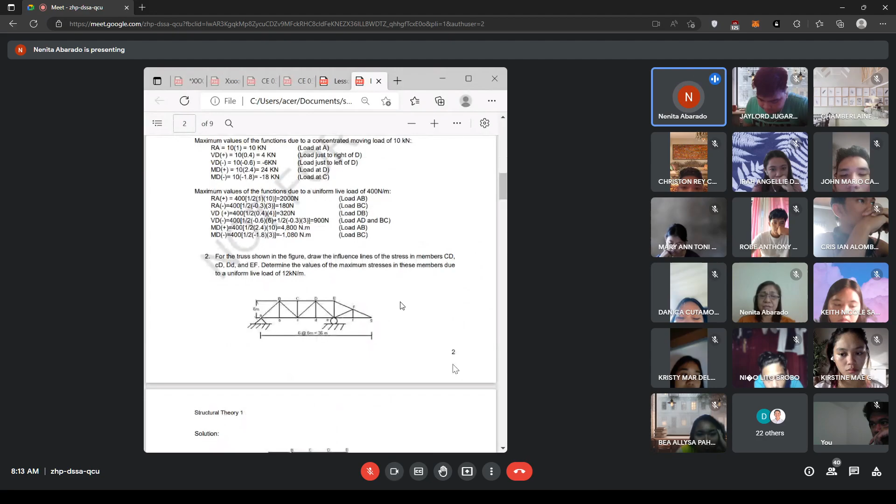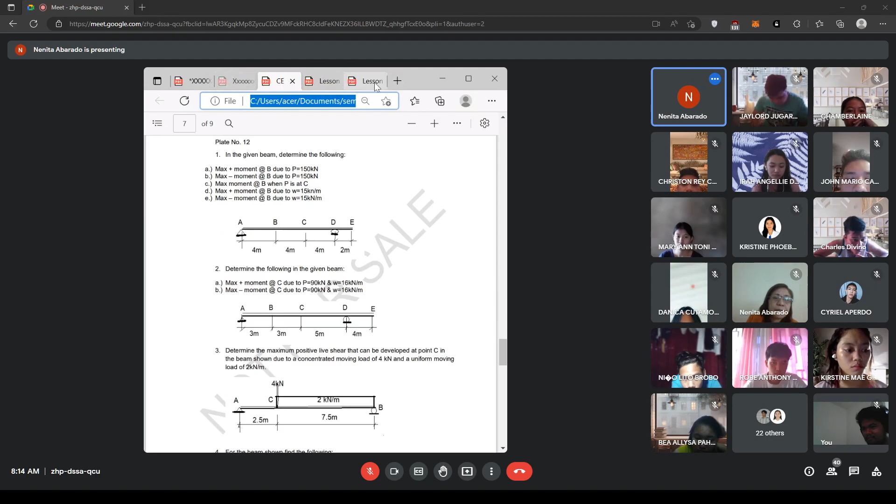So actually, class, pwede tayong mag-consider ng, let's say, 10 kilonewton concentrated load. So ang ating problem is to determine the maximum value of positive shear at point C. Or, pwede rin ang maximum value of negative shear.

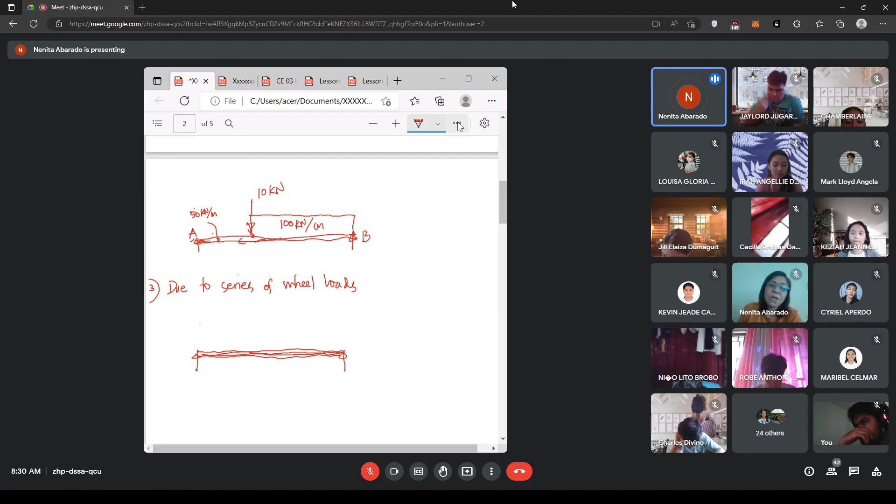Okay? Then, kung given na dead load mismo, dead load is not a moving load, kaya i-consider ninyo kung may given siya. Ang problem natin walang given, so kinonsider lang natin yung moving load. Okay, this is just a clarification. So, let me erase this. Kasi maybe, with all the references, all the learning materials that you can be exposed to, baka makakita kayo ng mga cases na may dead load si beam. That is really possible. So therefore, in analysis, i-consider ninyo si dead load, kasi may weight ang materials natin.

So, now, ang problem natin is, how about if we are all to be exposed due to wheel loads? Let's say this is a bridge deck. Ito ang beam ng bridge deck. Okay, so therefore, this will be analyzed due to wheel loads.

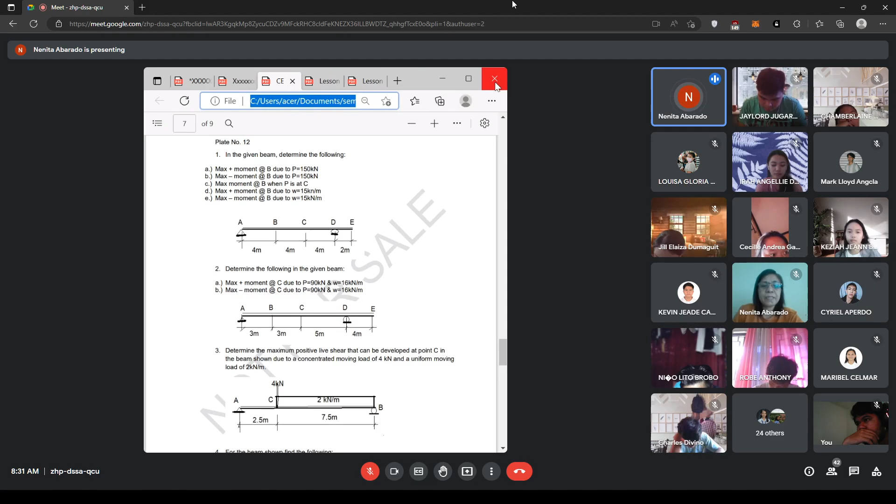Akin na lang i-off para hindi masyadong maingay.

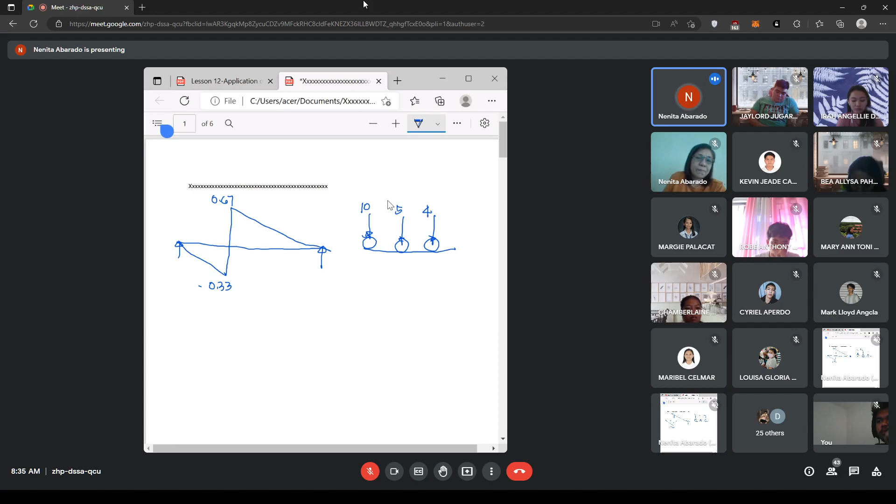Okay, class. So, this is just an example, ha? Let's say this is wheel loads. Let's say, sa car, car wheel loads. Kini ang wheel loads ng ating car. So, let's say, ang ating direction is going to the left from the right. Kini ang ating front wheel, kini ang ating last wheel. So, let's say this is 1, this is 2, and this is 3. Class, can you see it, class?

Yes, ma'am. Now, we want to determine the maximum shear at points natin. Let's say the problem is determine the maximum positive shear at point C due to these wheel loads, due to the given loads. Okay. Di ba, na-establish na first talaga, class, i-establish natin si influence line diagram. Importante ang mga ordinate natin. And then after that, ang due to concentrated load, as well as if there is also the uniformly distributed load. Now, how about if we have a series?

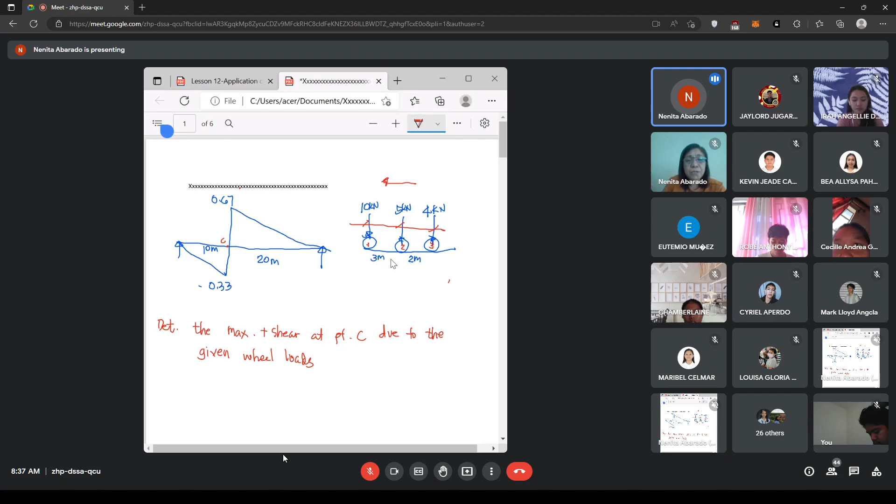Obviously, alam na natin ang distances kay wheel loadings man eh. So, if we want to get the maximum positive shear, kakaroon tayo ng trial and error, class. Let's say, trial 1. Ang trial 1 natin, let's say, 10 kilonewton at 0.67 ordinate, at point C na lang. Butang natin si 10 sa point C. Magkakaroon kayo ng tulo ka trials kay tulo ka loadings.

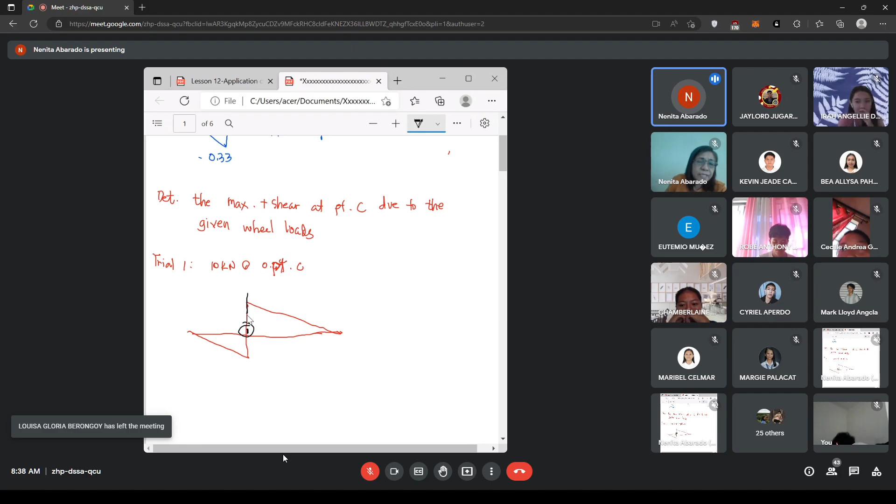Butang natin dire si load 10 kilonewton. So, load 1. Kung kini ay 10 kilonewton, mukuyog ba yan si load 2 at si load 3, class, ha? So, say magnitude, we have 5 and 4. So, 5 kilonewton at 4 kilonewton. Okay. Kuhain natin si slope. By triangle, di ba, this is 30. Ang kini ay 10 meters at kini ay 20 meters. So therefore, this becomes 1 is to 30, 1 is to 30, parehas din eh.

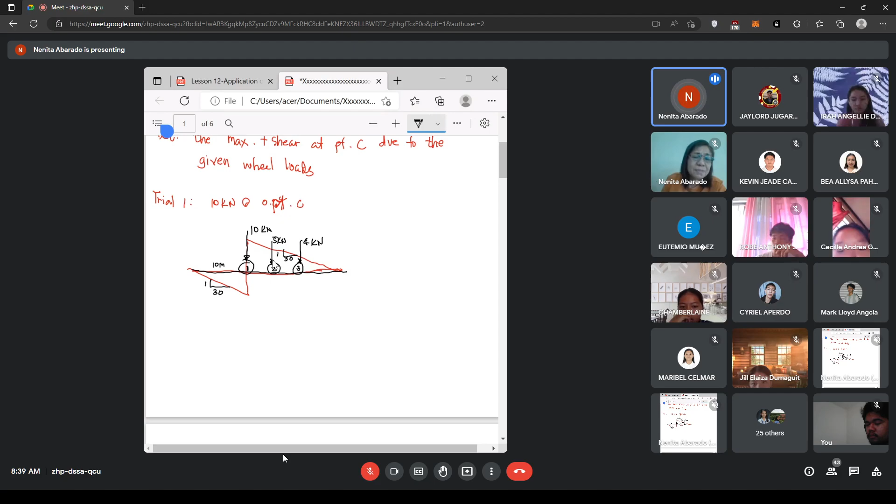Hindi ko na i-elaborate, kay third year na naman kayo. So you know already the property of the right triangle. One of the properties of the right triangle is the ratio and proportion natin. So therefore, with this ratio, yun ang gamitin natin. Kung hindi ratio ang gagamitin nyo, kukuhain nyo lang ang ordinate ng mga point, pero mas maganda ang ratio and proportion. Kung kini ay 20, ang distances is 3 and 2. Kini ay 3 meters, kini ay 2 meters. So therefore, at this point, kini ay 20 minus 3, so 17, and this is 20 minus 5, so this is 15.

So therefore, the way you're going to solve this is like this. This is A, and this is B. This is your point C. Okay. So maximum positive shear at C is equal to, butang natin si 10 times ordinate, 10 times 0.67. Or pwede nyo na rin gamitin yung slope niya, para hindi na ordinate ang gamitin natin. Kung sa slope, we have 1 over 30 times 20. What is 20 over 30? That is also 2/3, and that is 0.67. Nakuha nyo, class? 20 over 30 is 0.67. Just the same, para ka lang nag-multiply ng ordinate niya. Nakuha niyo ang point?

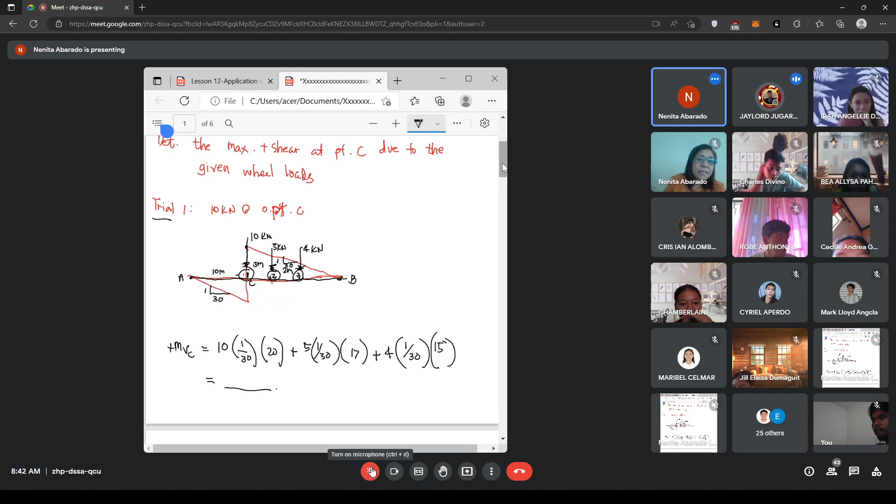Okay? Next trial, 2. Butang natin ang 4 kilonewton at 5 kilonewton, 5 kilonewton at point C. So, si 5 kilonewton, dalhin natin sa maximum ordinate. Tingnan natin makita sa inyo sa figure. So, again, nagari si 5 kilonewton.

Okay. Nagari na sila ni, kung kuni ay 5 kilonewton, kini si 4. Okay. Nasa niyo sa 10, abante na sa 10, nagari na sa 10, si 10 kilonewton. So, unsa naman ang ating distances now? 3 to, ano? So, do not forget, magkakasama yan. 3 meters, 2 meters yan. Okay. So, this is 10 meters, and this is 20 meters.

Okay, so yan ha. So, how are we going to do this? Again, the same. We have positive shear, maximum shear at C, is equal to 10, okay, 10, di ba? 10 times, di ba? This is also, para sa mga class, dapat ang kanilang slope, no? Para sa mga slope, 1 is to 30. Kasi dito, sinabayan natin yung 10 plus 20.

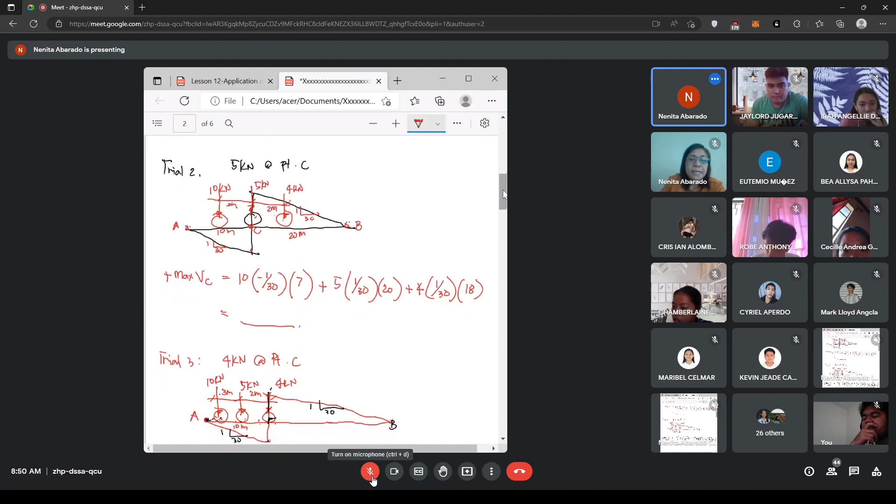So, kini class, dinhi ko kinuha din sa triangle sa positive portion. Kay positive pa man. But, definitely, kining 10 and 5, dinhi na siya ni fall sa negative portion. Kay nadiri naman sila. Okay? So, therefore, you're going to get the sum. And among these 3 values, kunin ninyo ang the greatest value. And that would be your maximum shear. Is it clear? Na mangutana ali kayo kung naa pa may question. This topic was discussed yesterday. Okay?

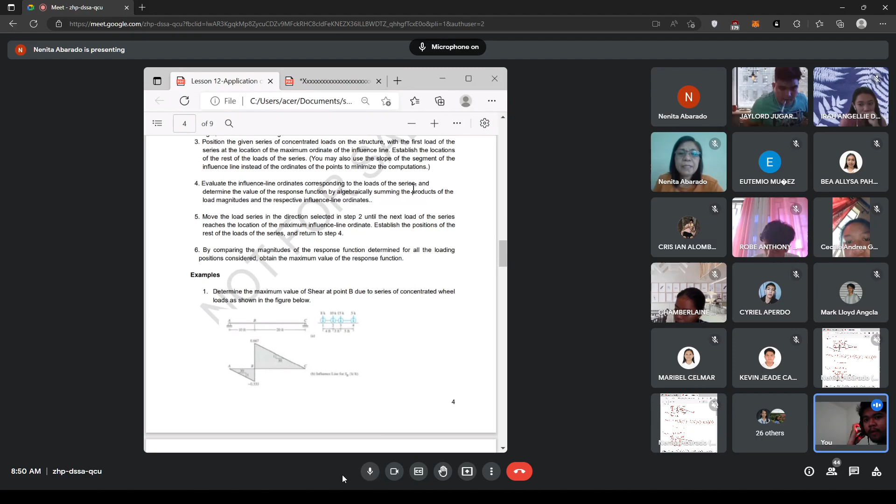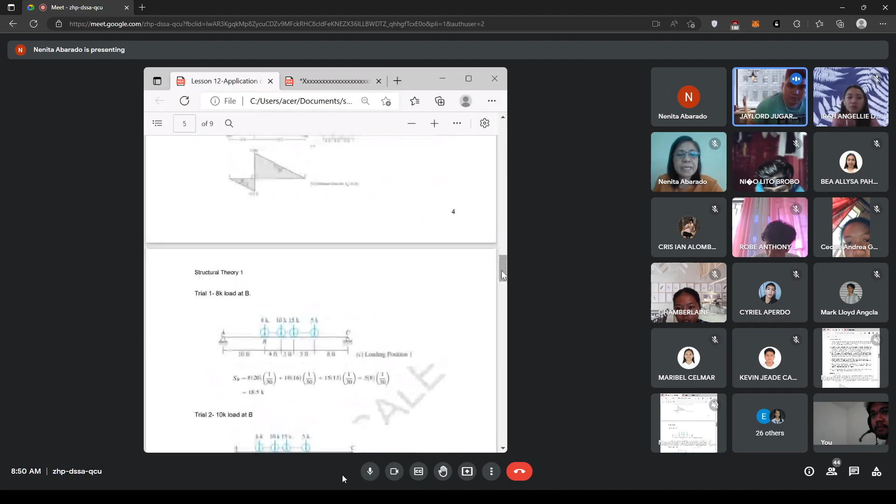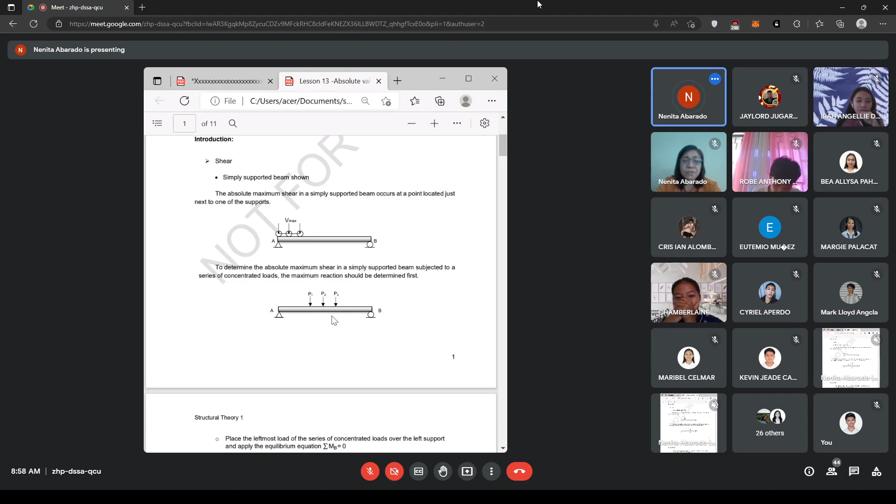And we can determine the absolute maximum shear in a simply supported beam. Again, when we say simply supported, the supports are roller and hinge, subjected to a series of concentrated loads. We are going to determine the reaction first, and not yet the absolute maximum shear. Determine the reaction first.

And then place the leftmost load of the series of concentrated loads over the left support and apply the equilibrium equations. Let's say the loading is P1, P2, P3, concentrated loads. Let's say it occurs at point A. So using the equations of equilibrium, determine the reactions, okay? And then place the rightmost load of the series of concentrated loads over the right support and apply again the equation of equilibrium.

So, ibig sabihin, butang natin din sa point B ang ating series of loads, and then getting the moment at A, get the reaction again. So, the largest value of reaction obtained will be the absolute maximum shear. So, it is just noting that we are just going to place the series of concentrated loads to one of the supports and then get the value of the reaction there.

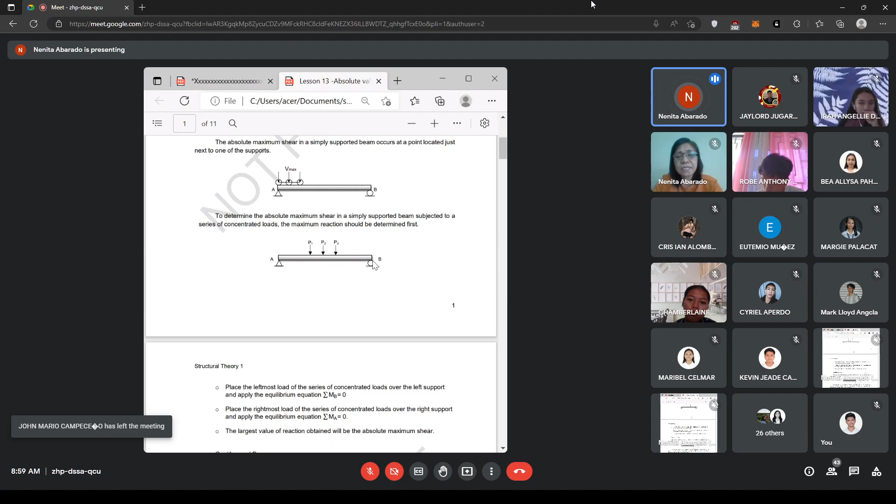Then gusto natin subukan sa ibang support, sa another support, place the loads sa support, let's say at B, and then by using the equation of equilibrium, get the reaction, and then you're going to compare alin ang bigger value, no? Nasaan ang maximum value? And that would be the absolute maximum shear. That is for shear on a simply supported beam.

For a cantilever beam, let's say cantilever ang ating beam, no? Ano ba yung cantilever? One end is fixed, other end is free, no? Free end. So take note that the absolute maximum shear in a cantilever beam will occur at a point located just next to the fixed support. That is the location where the absolute maximum shear is located.

Okay? So the absolute maximum bending moment, kung moment na siya, in a cantilever beam, of course, at the same point where the absolute maximum shear occurs. Although, in this case, the concentrated load should be positioned at the far end of the beam. Ibig sabihin ng far end, di ba? Ang isa ay fixed, other one is free, butang nyo sa free end. Then get the reaction. Kasi ang reaction nasa fixed man gud siya. Kaya nga it occurs just next to the fixed support.

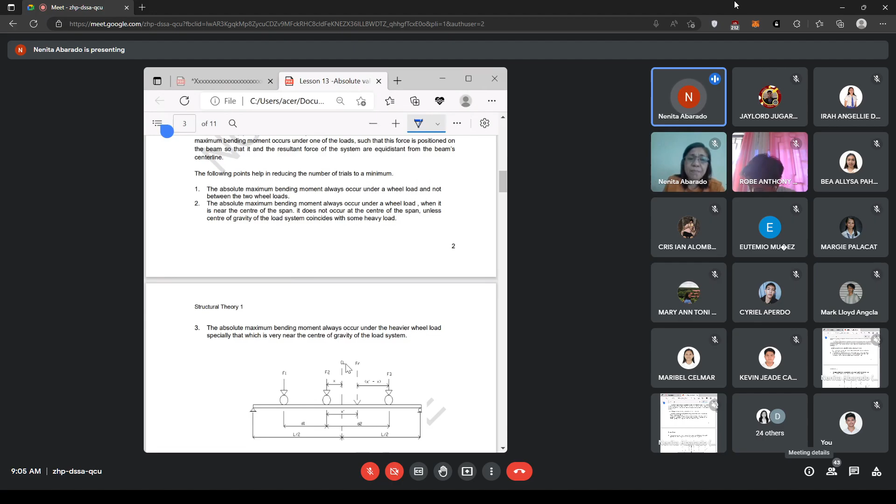Ang first step, class, is we are going to get the center span. Alin ba yung center span? Yung midpoint ng inyong beam. And then, if the absolute maximum bending moment occurs under one wheel load, when it is near the center of the span, it does not occur at the center of the span unless the center of gravity of the load coincides with some heavy loads. So let's say for example, ipoposition natin si resultant load. We are going to get the resultant of these 3 loads. Di ba? Naa tayong tulo ka loads. Kuha si resultant.

What is the resultant load? The sum of our loadings. Then, in our trial and error, we place the resultant load and one of the loads equidistant from the center line. So we need to get the center of your beam, then position your trial load and the resultant load so that they are equidistant. The distance from the center line should be equal. Then, solve for the reactions.

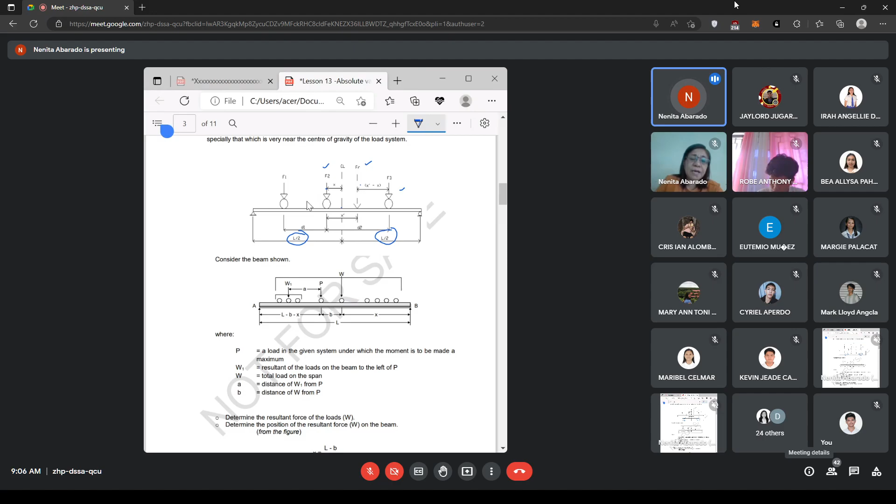Okay? Let's say, for example, let's take an example, class. Let's say a truck and trailer combination. So, meaning, there is the truck, and it also pulls a trailer. Having the axle loads shown, let's say 15, 25, and 50 kilonewton. In the figure, it rolls across a simply supported span of 12 meters. Okay, this is 12 meters.

These are our given wheel loads. Since we said wheel loads, obviously we note the distances between each load. Let's say for our trailer it is 2 meters, and then to our front wheel it is 6 meters. So, class, our beam is 12 meters, and the truck will pass through here. We are going to determine the magnitude and position of the resultant load. Let us get the resultant load. What is the resultant load?

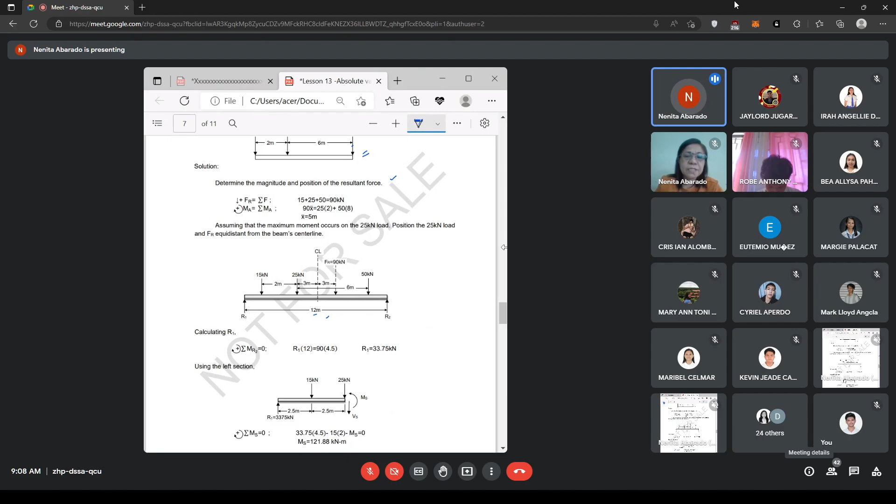Okay, class, are we still together? Can you hear me, class? Okay. So, the resultant is 15 plus 25 plus 50. Got it? Therefore, that is 90. That is the value of the resultant load. And then, we are going to determine the centroid. Find where this resultant load is located by getting the centroid of this group of loads. So how to get the centroid?

Our 90 times bar x. So this is our 90. From any of the loads, let's say, we take a reference point to locate it. Let's say our reference is the 15. From the 15, what is the distance to our resultant load? That is our center of gravity. So, class, you need to specify where you are referring from. You can choose any reference, but the result is the same.

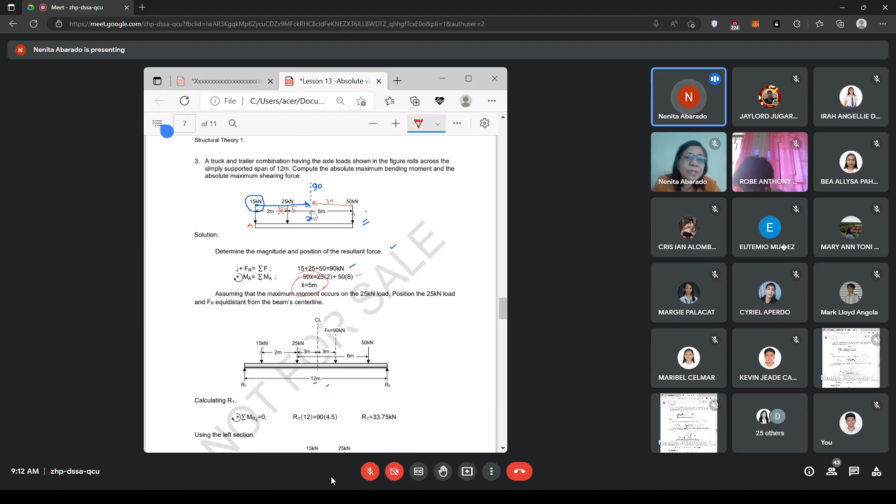After locating the centroid, from 15 to the resultant load is 5 meters. Summation of moment at A: 90 bar X, so bar X is equal to 5. So, 5 meters, which is 2 plus 3. So, it is 3 meters from the 25, from 2 to 5. Okay. So, let us now have the center line.

This is our center line. The beam is 12 meters, so the center line is 6 meters from one end and 6 meters from the other, since it is the center. Now, what about this? From 15 to 25 is 2 meters, and from 25 to the resultant is 3 meters. So, let's say this is our trial 1. Let's do a trial first.

I-try natin kining 25 at saka ang 90. Di ba sabi ko sa inyo, yung resultant load at ang isa sa load, i-locate natin equidistant from the center line. Class, can you follow? Okay. So, what is the distance sa 25 and 90?

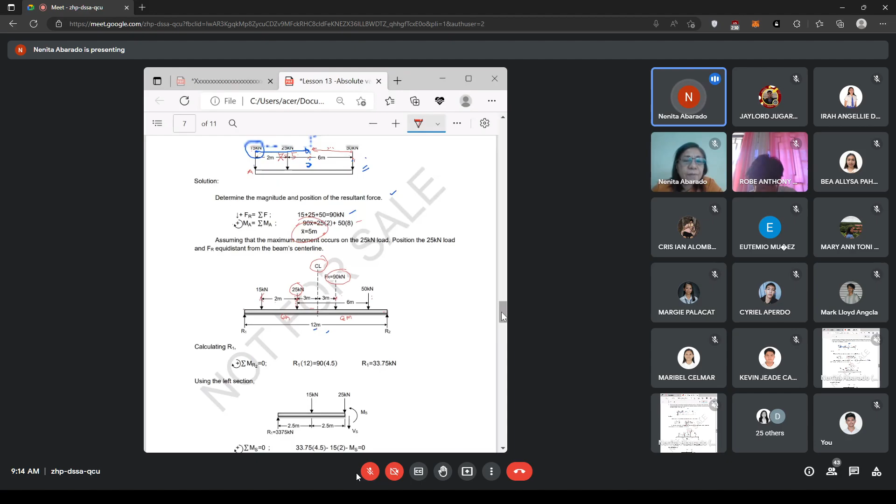Okay. So, ang ating loading ay 15, 25, and 50. This is 15, this is 25, and this is 50. Ang distance ani class is distance dire. Okay, clear ha? This is 2 meters. Teka, balikan natin. This 2 meters at 6 meters. Okay? This is 6 meters. Okay? Ang class ha? So, let's say this is 1, wheel load 2, and wheel load 3.

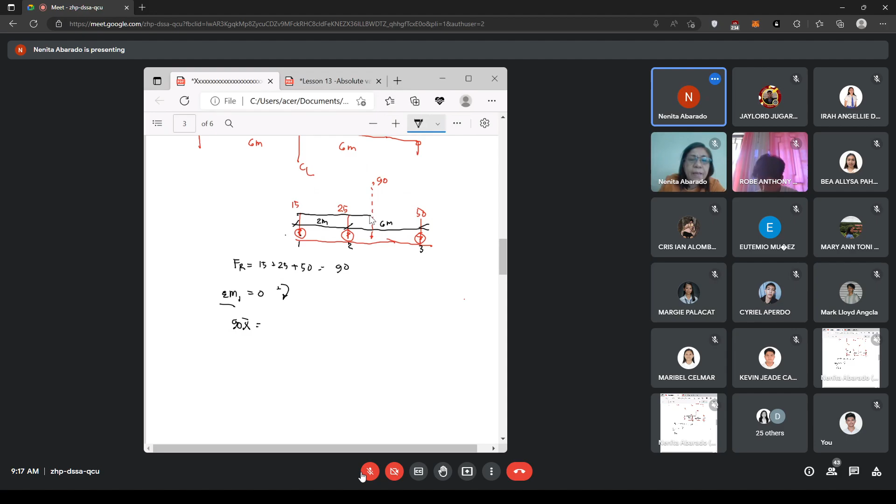So, 90 times bar x is equal to 25 times 2, plus 50 times 8. So, bar x now is equal to 50 plus 400 divided by 90. So, 50 plus 400 is 450 divided by 90. So, bar x is equal to 450 over 90 is 5 meters. So, ibig sabihin, gikan sa point 1 hanggang resultant load is 5 meters.

Now, if we are going to have the load, ibubutang natin karon siya dire sa ating span ng beam. Beam span natin, we have 12 meters. Okay, center line. So, itatry natin si 25 at saka si resultant load ng 90. Itatry natin siyang i-locate equidistant. So, kung sa ngayon ang distance ng duha na ni.

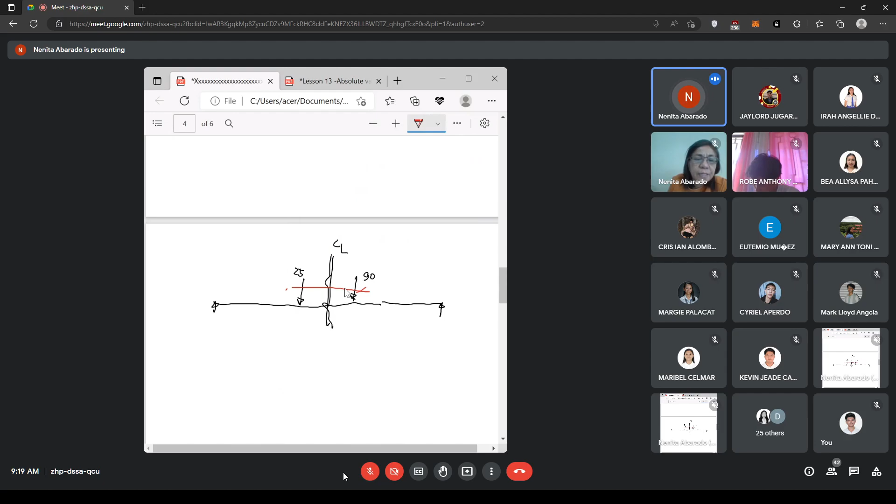Okay? So, makita naman natin, we have here 15. So, ang 15 natin is 2 meters, no? Ang ating 50 ay 6 meters. Hanggang dire ay 6 meters. So this is 6 meters, class, para hindi tayo malilito. So, kining 15 hanggang 90 is 5 meters. So, ibig sabihin, kung this is 5 meters, di ba this is 6 meters?

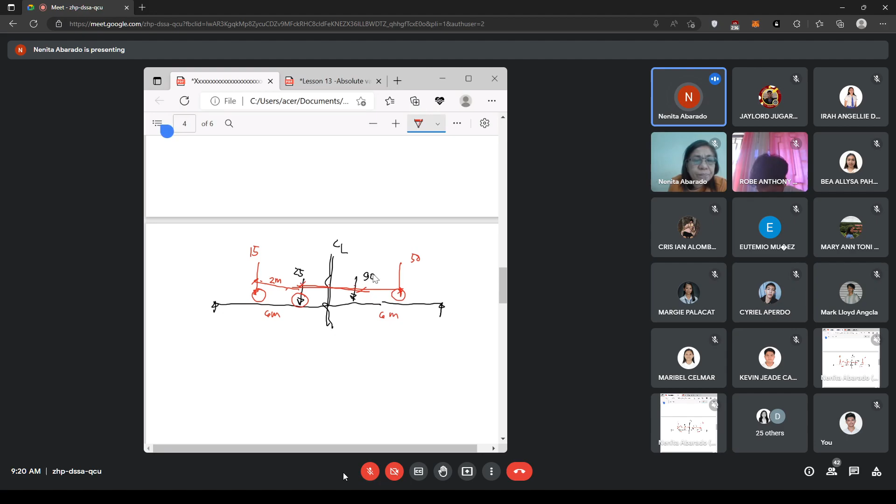Unsa may distance ng 25 and 90 karon? Kung 5 meters siya, di ba 2 meters hanggang 25? 15 at 25, 2 meters, then 15 hanggang 90 is 5. So, ibig sabihin, kini ay 3 meters. So, meaning, kung equidistance siya, gawin natin ni na 1.5, and this is 1.5. Kasi, ang distance ni class ay 3 meters. Nakasabot kayo? Nakasabot ba class?

So, 3 meters siya to make it 5 meters. Gikan sa 15 hanggang 90 ay 5 meters. So, kining 25 at 90, i-locate natin equidistance sa center line. Para maging equidistance siya, yung 3 meters, i-over 2 natin. So, 1.5 and 1.5. Okay. So, if this is 1.5 class, so 6 minus 3.5, so ibig sabihin, hanggang din is 2.5 na lamang. Sorry.

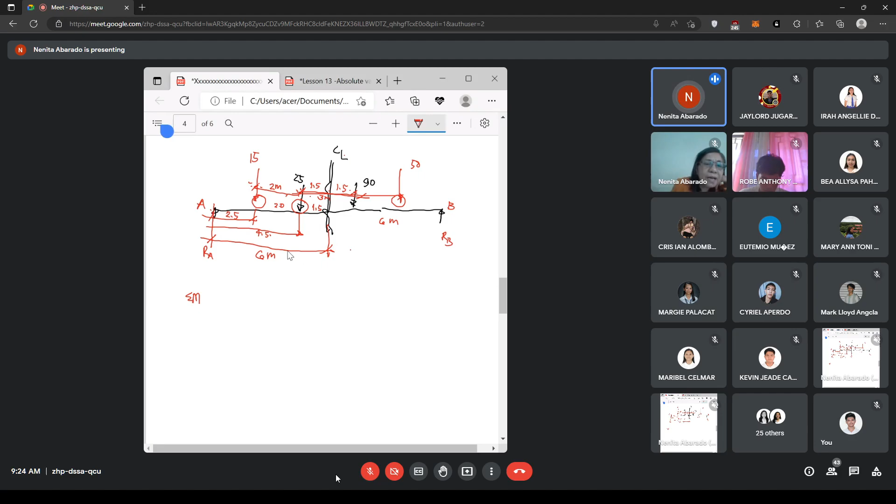Let's just consider 90, since it is the resultant. Getting the reaction, let's say summation of moment. Let's say this is R sub A, and this is R sub B. Summation of moment at R sub A is equal to 0.

Let's get the moment here. Of course, we only consider this 90 since it is already the resultant. We are not going to consider the 15, the 25, the 50, because we are just going to consider the resultant force. So what is our equation?

So we have 90 times the distance here from R sub A to our 90, which we have, 1.5 and 7.5. Okay? Class, can you follow?

90 times 7.5 is equal to R sub B times 12. Or we can have 90 times 7.5 minus R sub B times 12 is equal to 0. So R sub B is equal to 90 times 7.5 divided by 12. So that is our reaction.

That is our reaction at B. Next, in getting the... okay, so we already have the reaction. This one considers R sub A, it considers R sub A.

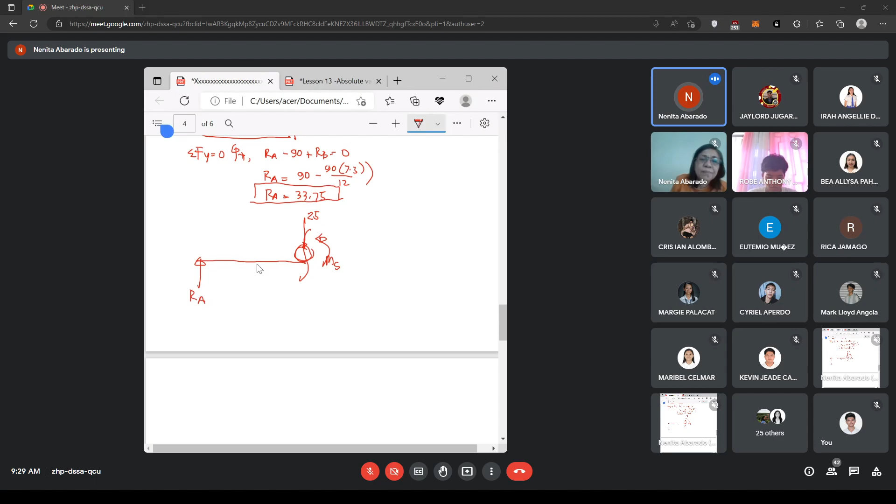So class, getting this free body diagram, we want to have the moment. So moment at this point: we have 33.75 times 4.5, which is the distance here, minus 15 times 2, minus M, equals 0.

So our moment now is 121.88. That is trial 1. Trial 1 only, class, okay? Did you get it?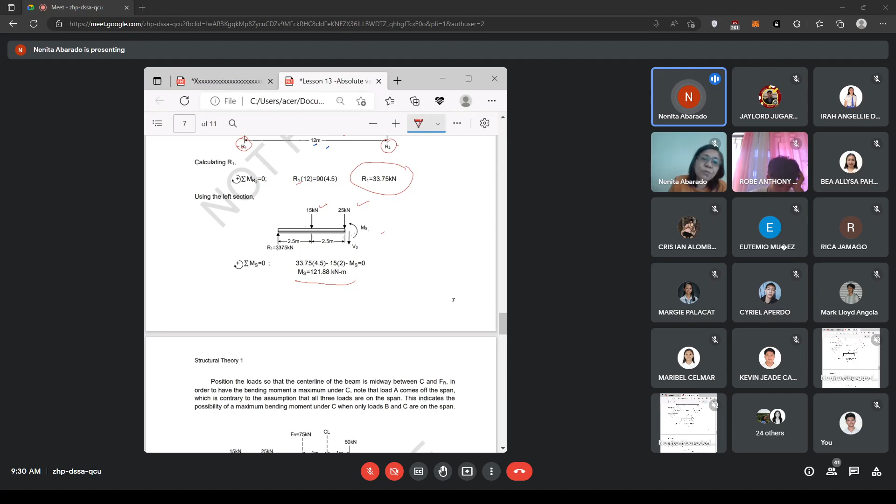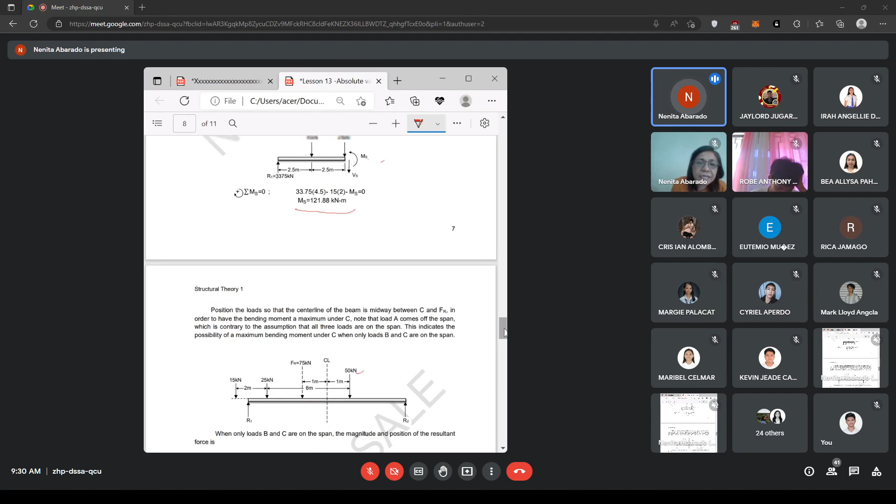Okay, good. That is for trial 1. Between 25 and 90, no? Okay, how about if you're going to have 50 and our resultant load? Position the loads so that the center line, if we want to try this 50 and the resultant load. If this is what we will try.

So, we position our loadings so that the center line of the beam is midway between, this was our C, A, B, C. No, between C and FR. So our FR became 75. Because, class, in order to have the maximum bending moment under C, under there is a load of 50, note that load A comes off the span. It falls off. So once it falls off, class, only 50 and 25 are left.

Do you understand? Because it is a moving load. So, which is contrary to the assumption that all three loads are on that span. This indicates the possibility of a maximum bending moment under C when only loads B and C are on the span. So, only this will be considered, the loads 25 and 50. The resultant is 75. Okay.

About this load, B and C are on the span, the magnitude and position of the resultant force is, let's say we want to get the magnitude, 25 plus 50 is 75, and then let's say moment at point A is equal to summation of moment at point A. So we have 75 times bar x is equal to 50 times 6. 50 times 6, because the distance between 25 and 50 is 6. So we take moments here, moment about 25. So we have 75x equals 50 times 6.

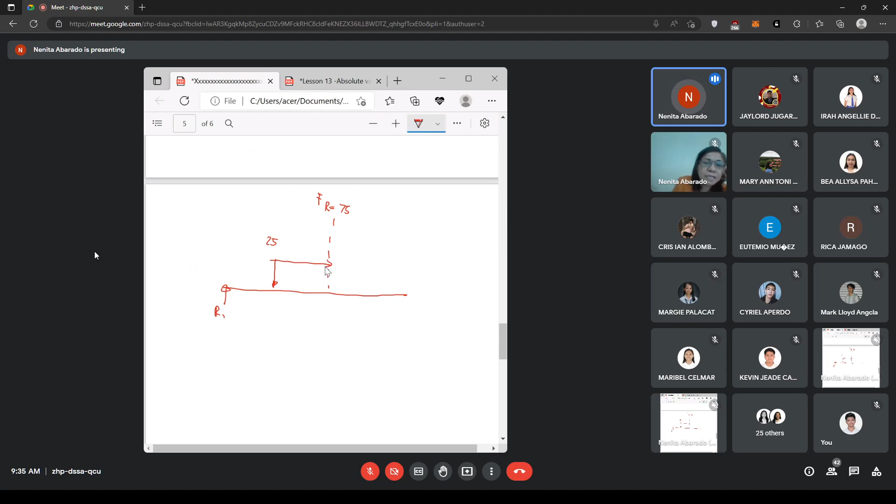Let me draw it here so you can see clearly. Okay, so this is our, let's say, R sub 1. This is our 25. And this is our resultant force FR of 75, right? The distance from here, this is 4 meters from your computation. From here to there is 6 meters. But from the center line, it is 6 meters up to here. So from here, class, it is 1 meter, because it is equidistant to the 50. So, in the 6 meters, what remains is 1 meter. Okay? Just 1 meter.

So, therefore, the distance from the resultant up to this support, summation of moment of R sub 1 is equal to 0. What we are considering is equal to 0. So, we have 75 times 5. Because this is 4 meters, plus 1 meter. This 1 meter, class, and this is 4 meters.

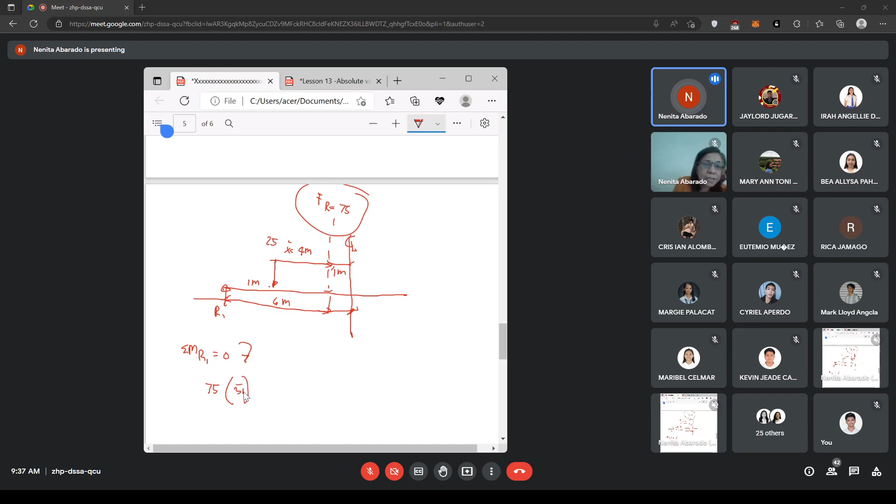Kasi hanggang, this is bar X. So, we have 5 meters is equal to the distance 50. Saan na yung distance na 50? No. R sub 1, R sub 2. We need to have R sub 2. Dito siya, R sub 2. Sa ating R sub 2 times hanggang din ay 12 meters. Diba? Ang ating R sub 2 is the reaction.

So therefore, class, this is our R sub 2. So nakuha na natin R sub 2. That is 75 times 5 divided by 12. Okay? 75 times 5 divided by 12. So ang R sub 2 natin is 31.25.

So considering now the right section, na lang tayo mag-consider ng moment. Moment sa 50, yung 50 ang kukuhaan natin. Okay, alam naman natin si R sub 2. So moment here is equal to 31.25 times 5. R sub 2 times 5. Kasi moment here, 31.25 times 5 minus MS. So, MS now is 156.

Out of those two loads, the 50 and 25 that we tested, we have a comparison that this is greater than 121. So ibig sabihin, kahit hindi na natin i-test ang 15 at ang resultant load, pwede nyo rin i-test. By common sense, makikita natin na ang kanyang moment ay mas maliit kung i-compare sa 25 or 50. But you can do so. I-try ninyo ang inyong 15 at saka ang resultant load.

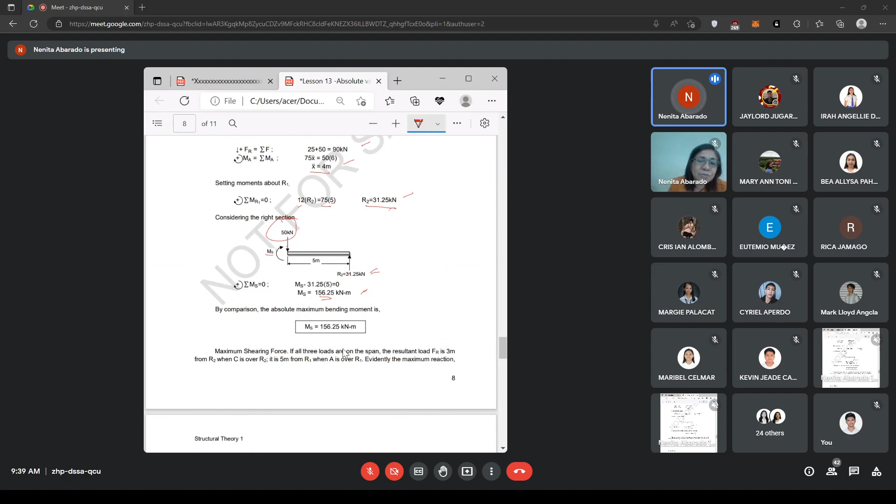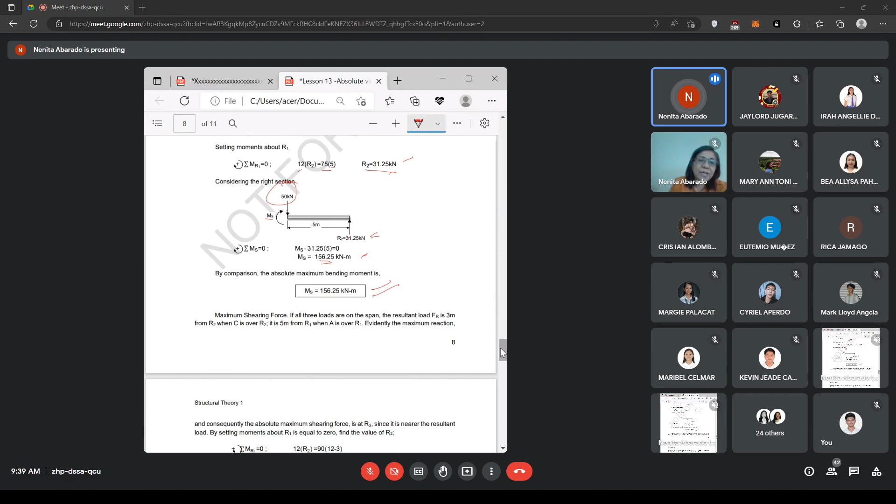Position nyo yan. And then, ang kuha nyo yung 15 at saka sa resultant load, dalhin ninyo siya sa center line. Okay? So, to get now the absolute maximum bending moment, yun ang inyong gagawin. And consequently, the absolute maximum shearing force is R sub 2 since it is nearer the resultant load. Obvious naman, kung alin ang mas near sa resultant load, nandun ang absolute maximum shearing force.

We are going to solve for R sub 2, considering now your 90 at saka yung position niya, for the maximum shearing force. Okay? So, summation of moment at R sub 1 is equal to 0. So, we have 12 R sub 2. Ating bagbalik, 12 meters. This is R sub 2, this is our R sub 1. So, 12 R sub 2, then ang 90.

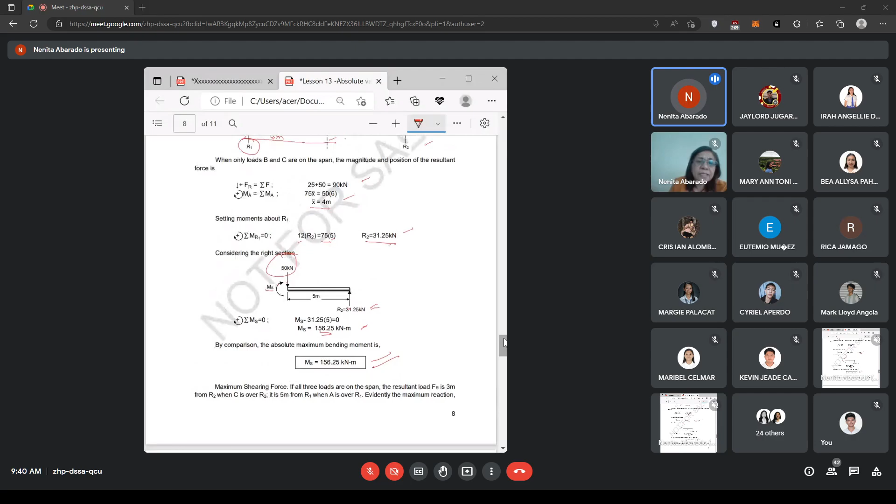Why is it 12 minus 3? Kasi yung ating 90, kung nakaposition siya, R sub 1 tayo. 90 yung total load. Ang total resultant load niya, class, is located at a distance of 12 minus 3, which is equal to 9 meters. So, where is that 9? Class, yung 90 natin, kung ating ipo-position, 12 minus 3, that is yung 90 natin.

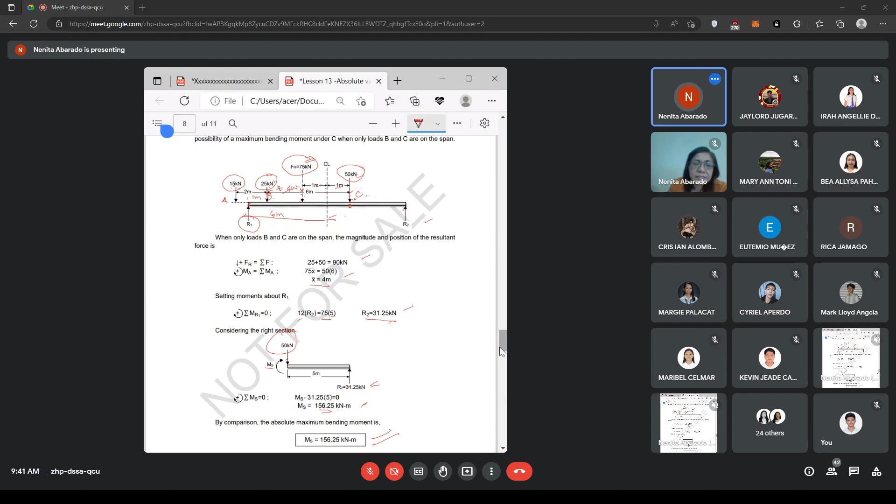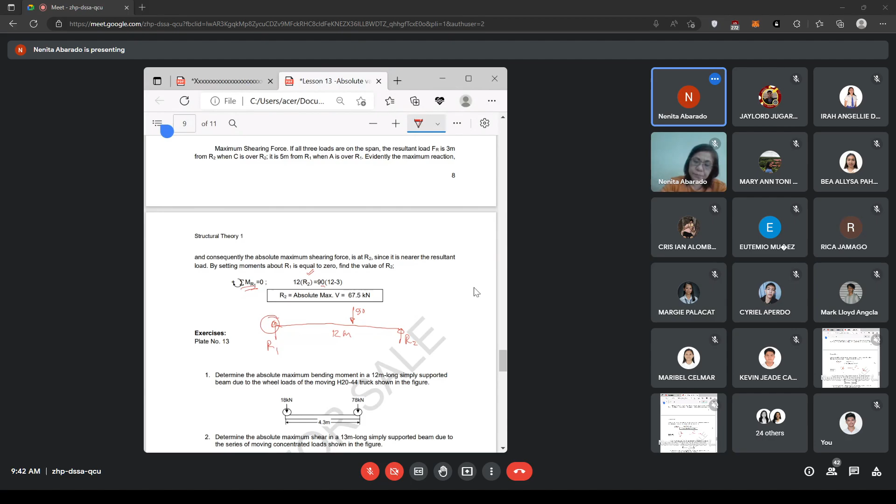12 R sub 2 is equal to 90 times 12 minus 3, moment at R sub 1. That is 9 meters na, that is 12 minus 3. So, 12 minus 3 is 9 times 90, 810 divided by 12. So, absolute maximum value of shear is 67.5. Okay. So that is now the principle of the absolute maximum bending moment.

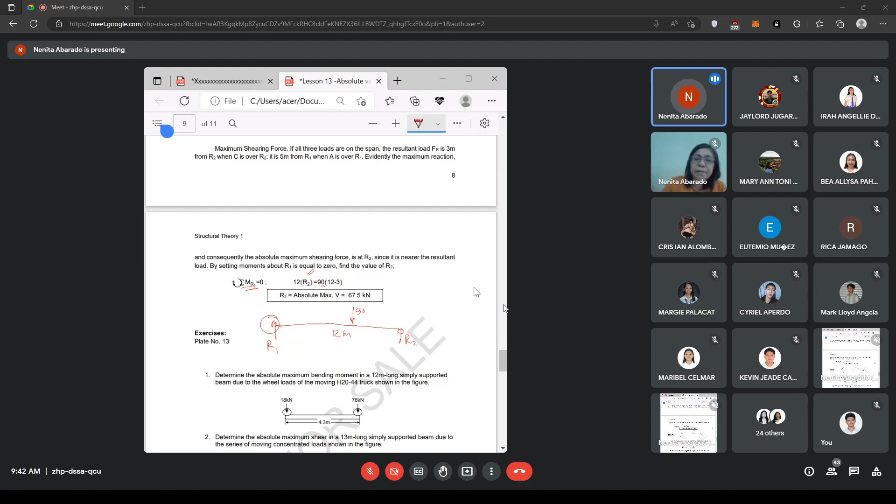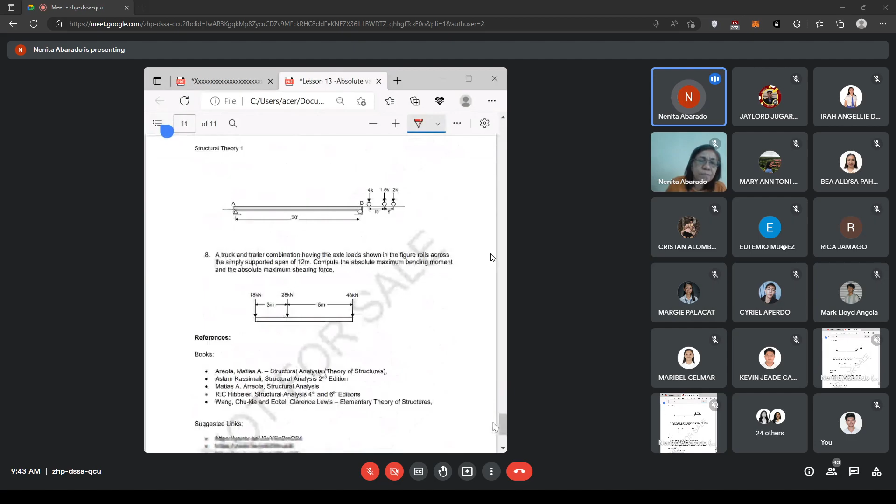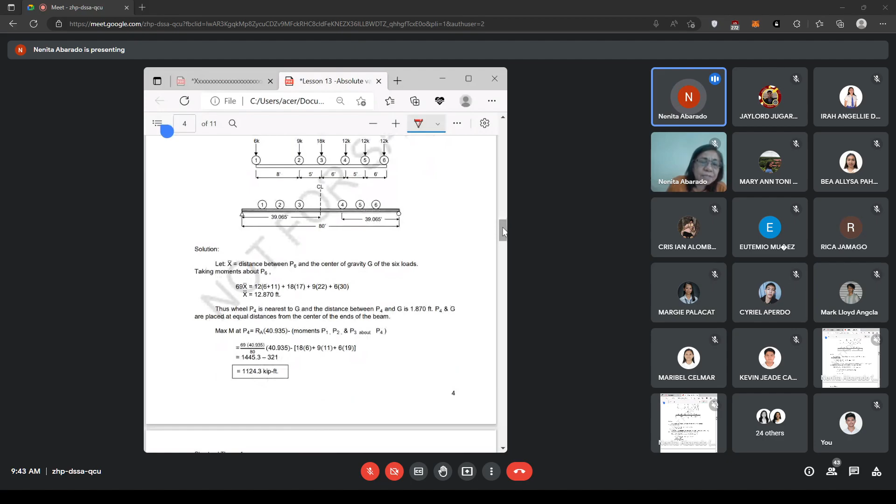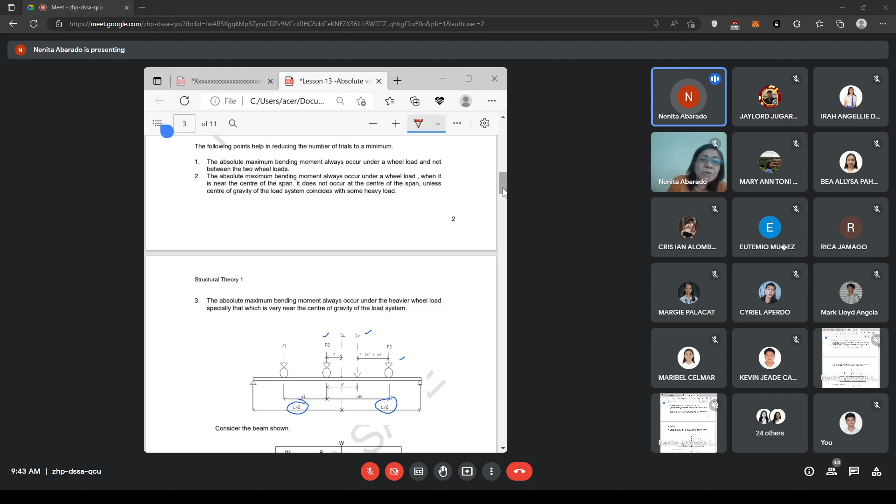So there are several examples given, class. We have example 3, example 2, and also example 1. Dagan-dagan na mga examples naka-provide sa inyo. I think from these examples, just go over again with these given examples so that kung may mga queries, pwede kayong mag-refer. Also, you can refer from these references. Yung references natin, pwede kayong mutanaw sa mga links. These are YouTube links. We have also by Areola, by Kassimali, by Hibbeler and by Wang. So those are the references that you can use as well as the YouTube link.

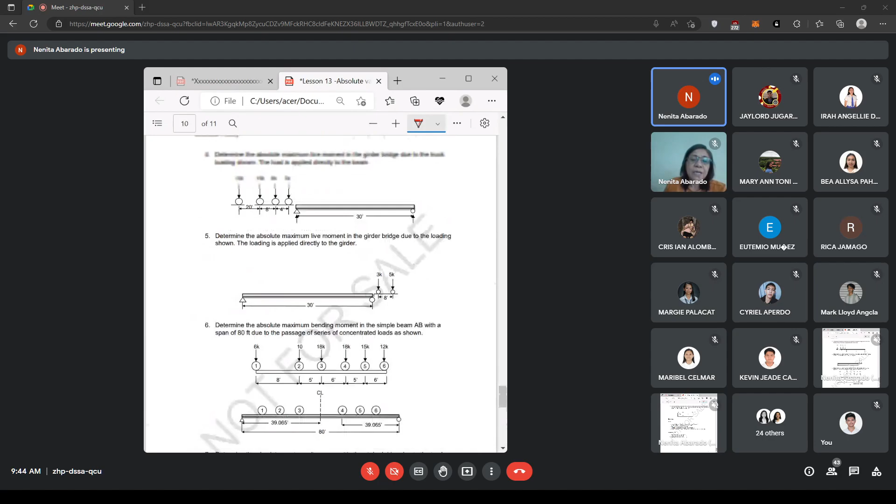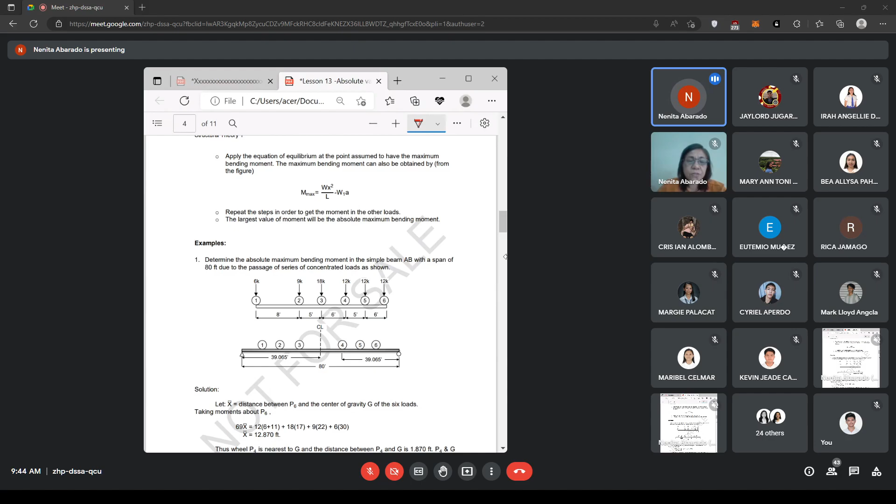However, I am just encouraging you to use these problems as your review materials also for your final. So this is just a sort of familiarizing you with the last topics, na tayo'y application for moving loads. Okay? So that's all for today, class. And if you still have questions, you can now ask your questions. Yes.

Kasi nagtapos naman tayo last time. Nagtapos tayo before the compound truss, ano? So, maapil ang ating trusses, ang ating complex truss, as well as your space truss, and this moving loads. Yun lang naman, class. Maghatag din ako ng konting objective. Siguro mga 10 questions.

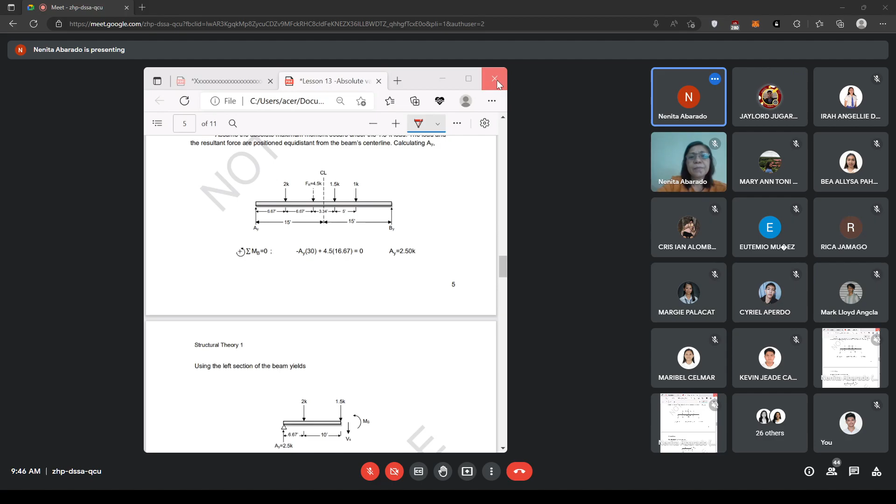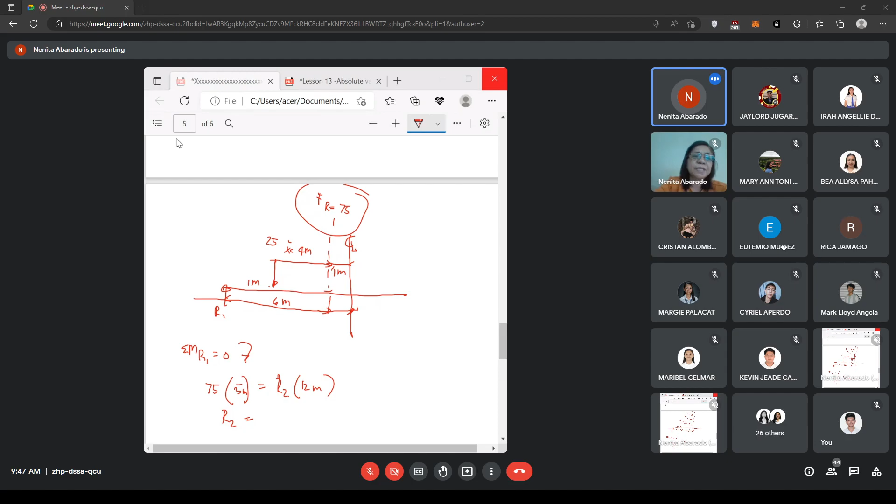Papel. So, try to use the same paper din, no? Kayo na lang ang mag-prepare ng inyong answer sheet. Lagyan na maayos na cover page. Hindi katulad sa una na murag bisang cover page wa manggani ma-present ng maayos. Merong nag-present na maayos na cover page, meron namang cover page basta lang. Ayuhin man lang ninyo ang inyong handwriting sa inyong cover page. Kaya tuloy ang answer, wala rin.

So, another question. So, siguro, just prepare the same number of answers as in midterm. The same number of answers. Tingnan natin kung ang problems, murag 4 lang naman tingali. So, probably, mga hapon eh. Maybe lesser, maybe more. Basta within the topics time.

So again, ang inyong plates, tutublag kayong plate number 10. Ibig sabihin ang plate number 10, yan ang inyong construction of influence lines. No application yan, wala kang application. Pero ini-encourage ko kayo to solve the problems given in your plate sa inyong application. But definitely, hindi ko na yung sisingilin sa inyong plate. Para lang sa inyong review. Kayo nang bahala. Okay?